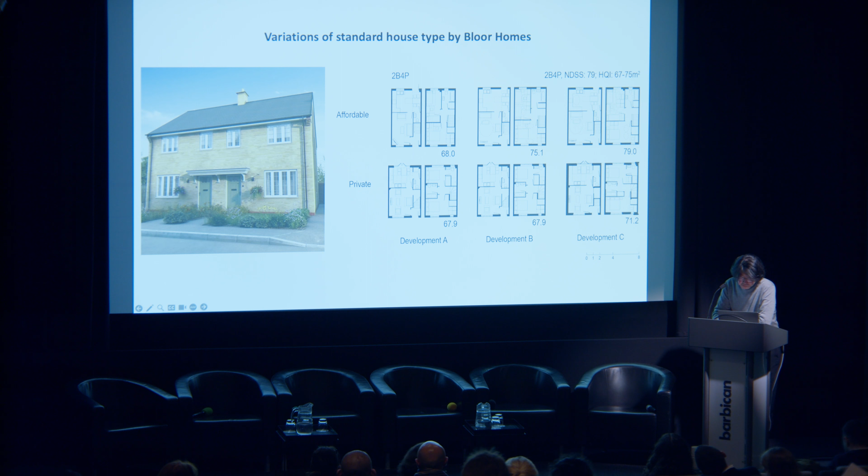As an audit by the Place Alliance found, the design of 3/4 of 142 large-scale housing developments completed in England from 2014 to 2019 were mediocre or poor, and over 1 in 5 developments should not have been given planning permission. Much housing in England is the outcome of economic decisions and established practices and preferences by few large organizations, with the 10 biggest volume house builders responsible for 59% of new private homes in Britain. This limits diversity in housing supply and design.

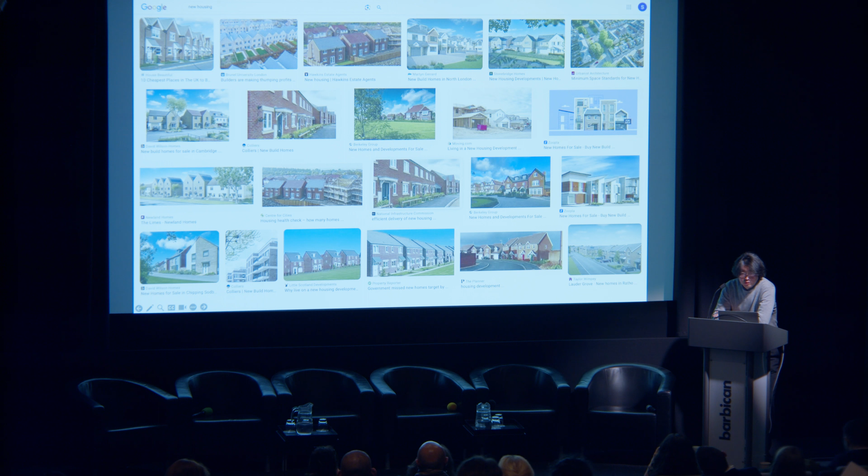Our project is therefore interested in the role of standardization and design governance in shaping housing outcomes and experiences. This is essential to understanding how design quality is defined and controlled, but also how it ultimately affects everyday life. By design governance, I mean the formal and informal tools employed by the government and housing providers or stakeholders to control the quality and types of housing being supplied. As categorized by Matthew Carmona, design governance encompasses 3 key functions: guidance, incentive, and control.

Our focus is on subsidized housing, increasingly referred to as affordable housing, which is typically designed to just meet the minimum legal and market requirements and characterized by standardization. Subsidized housing is where design regulations arguably matter most, and subsidies are commonly conditional to meeting minimum standards. So-called affordable housing is, however, often not affordable to many low-income households.

In 2021, only 12% of affordable housing was for social rent. The average affordable rent in England of £136.29 per week equates to 46% of the median annual household income of the poorest fifth in the UK. The majority, 54%, is for affordable and intermediate rent homes, which can be up to 80% of local market rents, and in less affordable areas exceeds the median national income. And of course, as you might know, shared ownership is targeted at mid-income households.

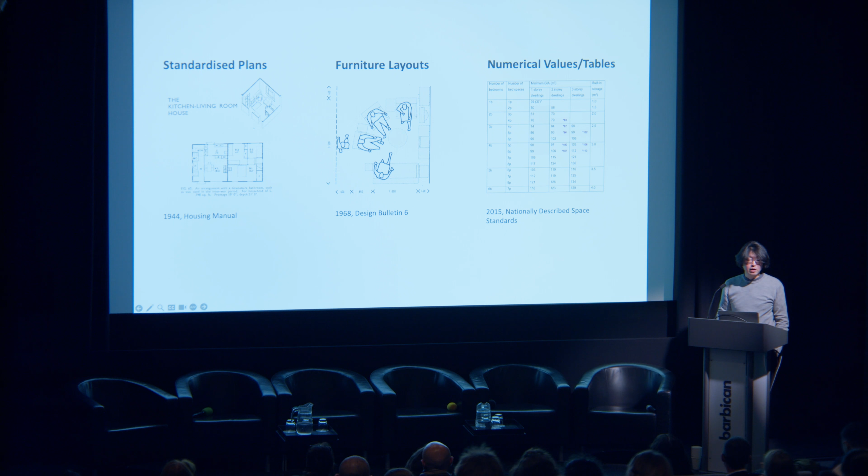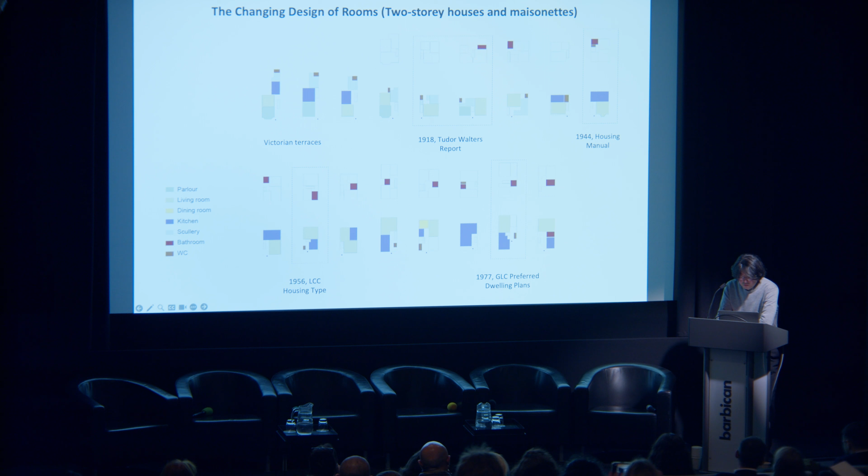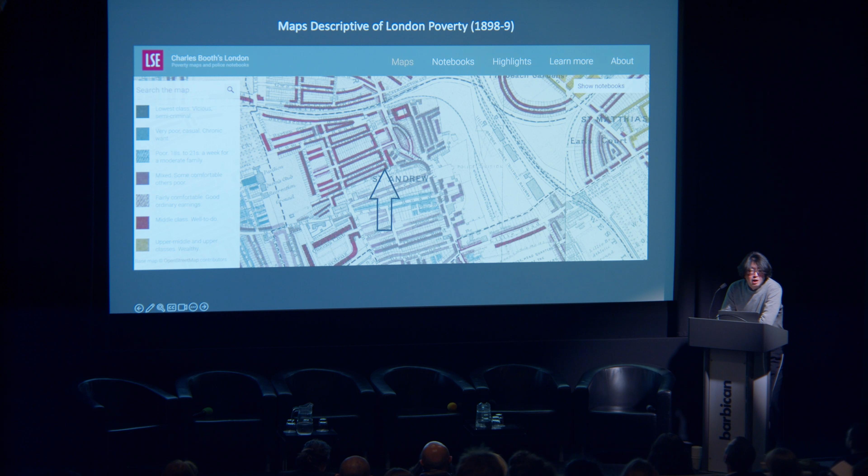Space standards have become a key measure of housing quality based on two fundamental beliefs still largely upheld. First, a socio-spatial belief harking back to 19th century Victorian charitable housing trusts that improving the housing and life of the lower classes means improving their moral behavior and social conduct. Second, a socio-technical belief that socio-spatial relations can be mapped, measured, and improved, as first demonstrated by Charles Booth's social cartography.

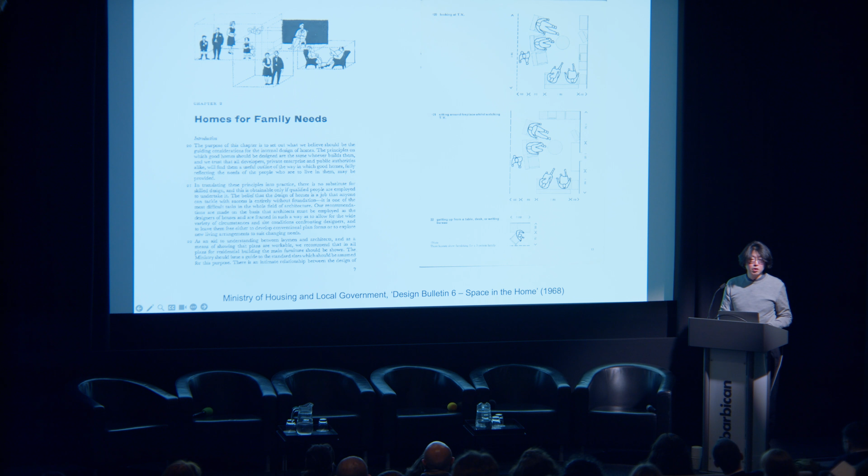Space standards instrumentalize these beliefs by translating normative daily domestic activities and spatial hierarchies based on social norms, specifically the nuclear family, into graphical, anthropometric data, standardized furniture dimensions and activity zones, and circulation space required by the various expected uses of a home. This principle of abstracting home use, function, and social norm into a drawing with dimensions has become a pseudoscientific proof of good design and conventionalized by design handbooks such as Ernst Neufert's Architects' Data and the widely adopted use of minimum space standards.

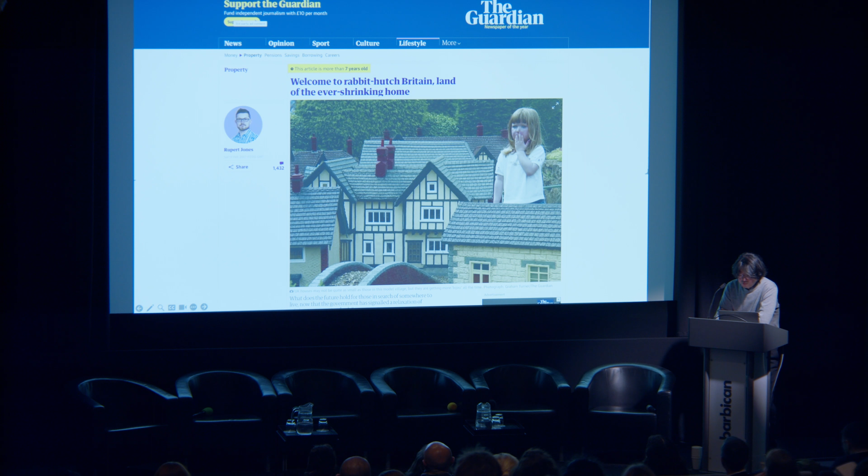A key problem of minimum space standards is, however, that rather than being aspirational, they often become the targeted maximum dwelling size that does not necessarily ensure usability, as we all know from COVID-19. Despite a long history of space standards since 1918 in England, properties are marketed and described in relation to the number of bedrooms, not overall floor areas or cost per square meter, with many homeowners and renters therefore not knowing how big the properties are. At the same time, the small size of homes in England is frequently discussed in the media.

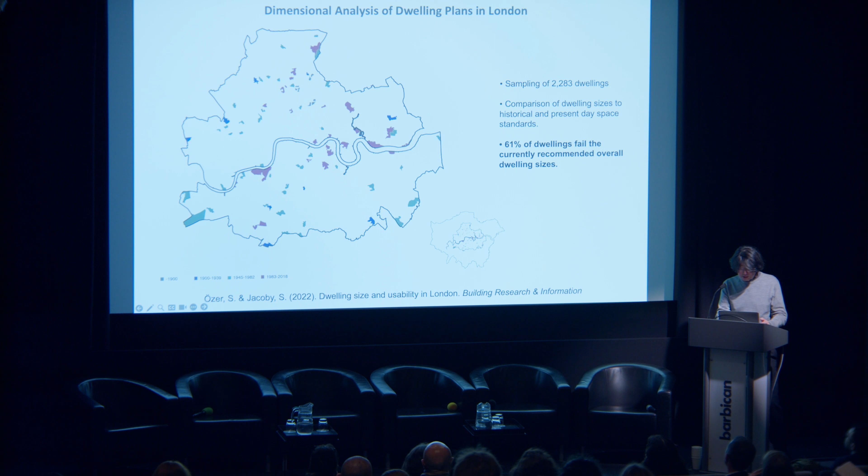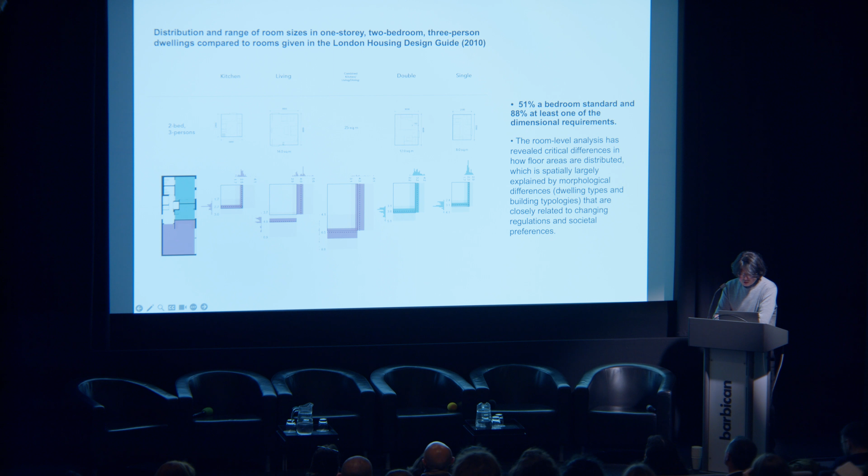We therefore studied dwelling sizes in London, and as the housing stock is very old, with 56% built before the end of World War II, and many properties having been substantially changed over time, we found that 61% of dwellings failed the space standards of the 2010 London Housing Design Guide, which is fairly translated into the current nationally described space standards. In fact, 88% of properties failed at least one of the minimum recommended dimensions in the London Housing Design Guide. However, since the introduction of the guide, the overall failure rate has dropped to 33%.

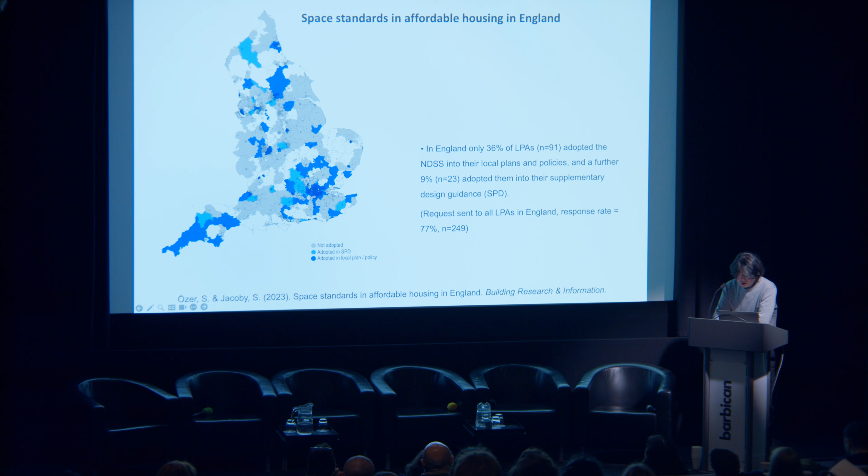We subsequently studied the space standards of new affordable homes in England. The current nationally described space standards, however, are not mandatory, and only 36% of local planning authorities have adopted them. We found that 43% of the dwellings we looked at failed the space standards. Now, to answer the question if space standards work, the simple answer is yes, if comparing outcomes between councils that have or have not adopted space standards. But it is more complicated.

As this table shows, the overall compliance rate in local authorities that adopted the space standards is 69%. However, less than half of all houses meet the NDSS, as they can provide the expected room sizes without achieving the overall space standards. There are significant differences in regions and between housing providers, yet even where homes do not meet the current NDSS, they are designed to some standards, such as the HQI, as the data shows here. Right?

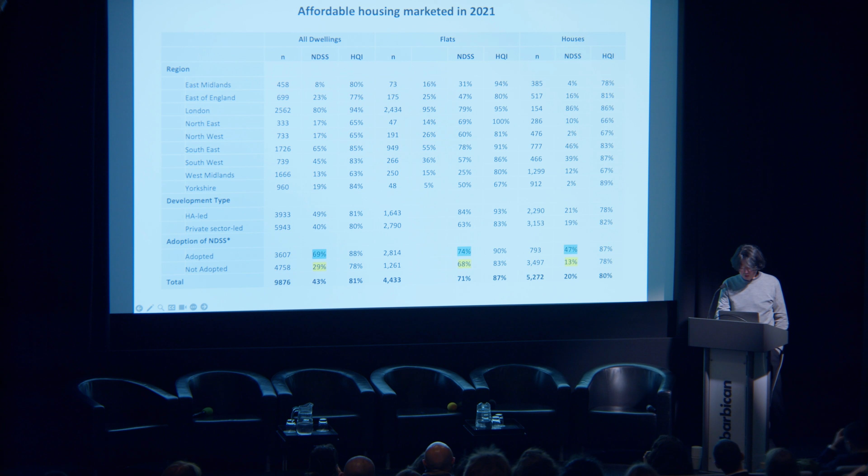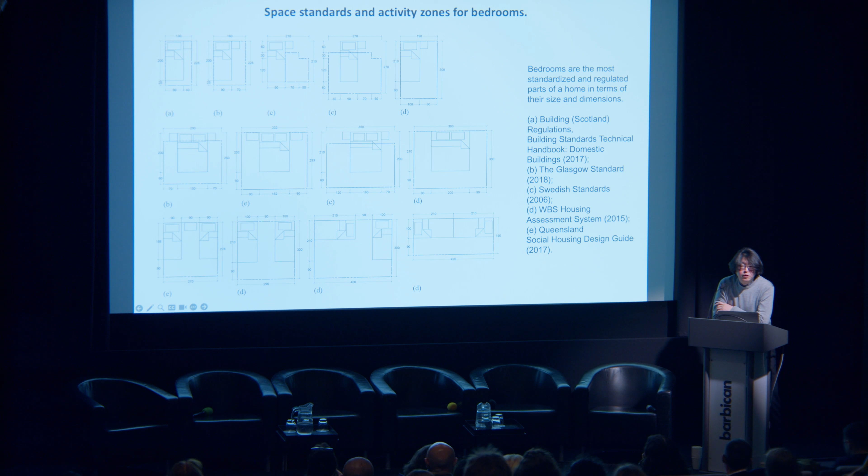Standards have been in use before. Even room standards and required activity zones that we would assume to be more objective can differ significantly, indicating various furniture standards and cultural expectations. For example, the minimum size of a double bedroom ranges from 9 square meters in France to 12 square meters in Scotland. In Australia, a minimum 90 centimeter wide movement area next to the bed is required, whereas in the London Housing Design Guide, it is only 40 centimeters.

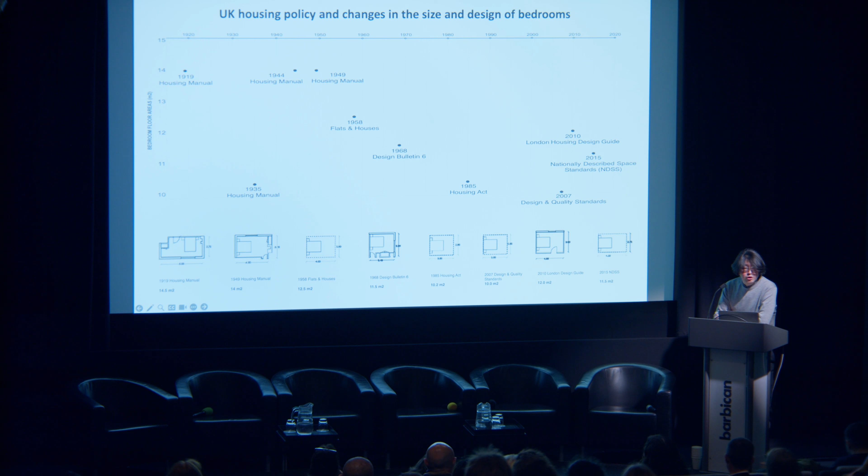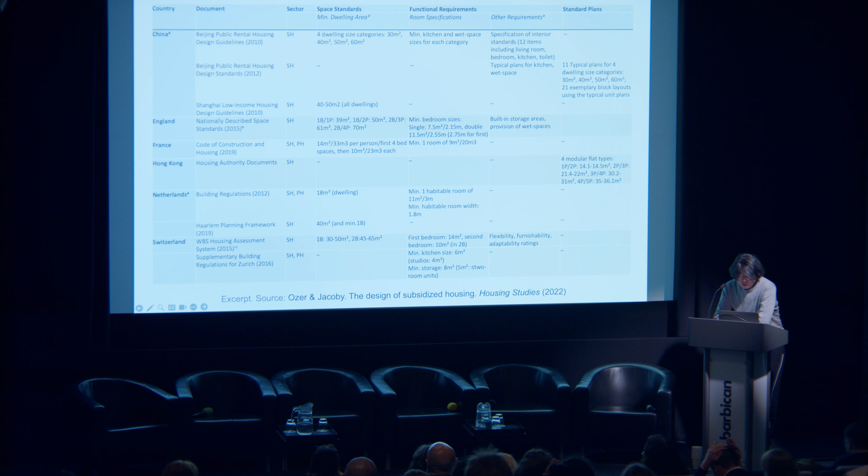These differences are only partially explained by housing provider tenure or target group, especially in countries with universal design controls that equally apply to all sectors, and often reflect different economic development and sociocultural norms, resulting in vastly different dwelling sizes and housing expectations. This is also evident from how housing standards and quality are determined or controlled in different countries. And the dwelling size is prescribed. For instance, the standard unit size for a two-person dwelling is 14 to 22 square meters in Hong Kong, 28 square meters in France, 49 square meters in Canada, and 55 to 65 square meters in Australia.

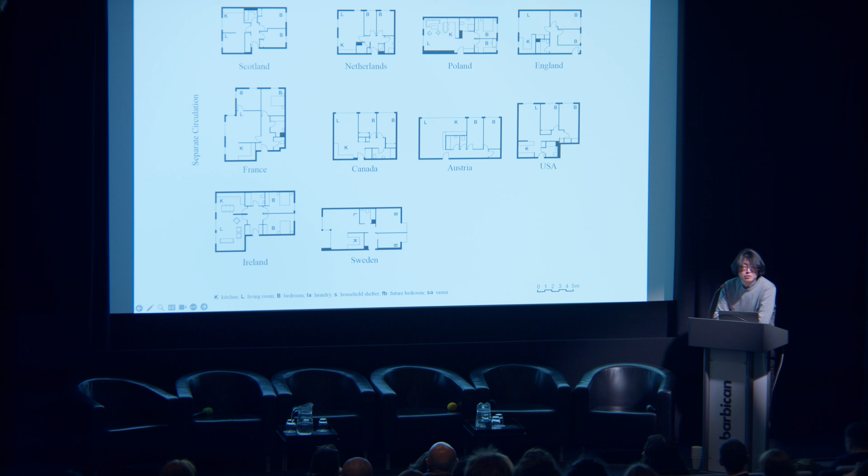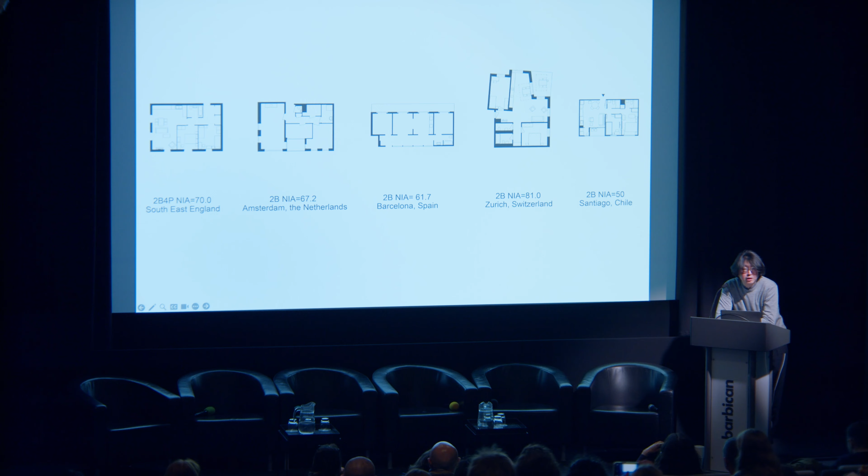With housing in England, the Netherlands, and Chile delivered by large volume house builders, highly standardized layouts are common, whereas in Barcelona and Zurich, where developments are typically based on design competitions, there's much greater variation. In the countries discussed tonight, housing in Zurich is noticeably larger than in England. Homes in Santiago are much smaller, and in the Netherlands and Spain, they're slightly smaller than the ones in the UK.

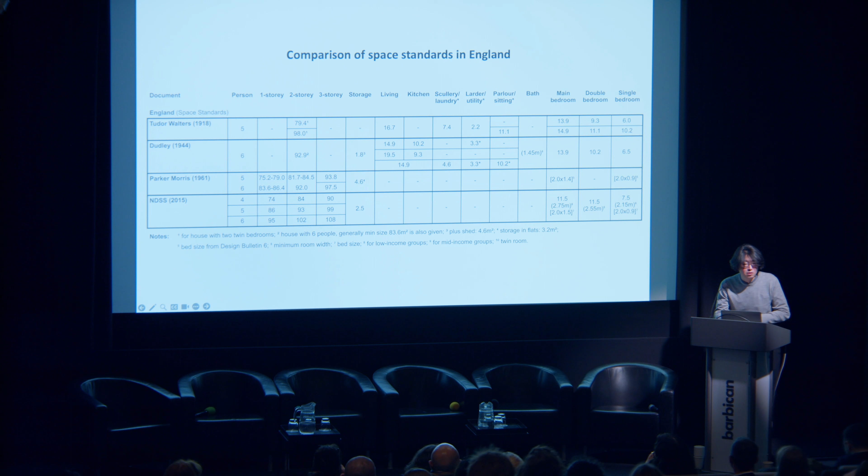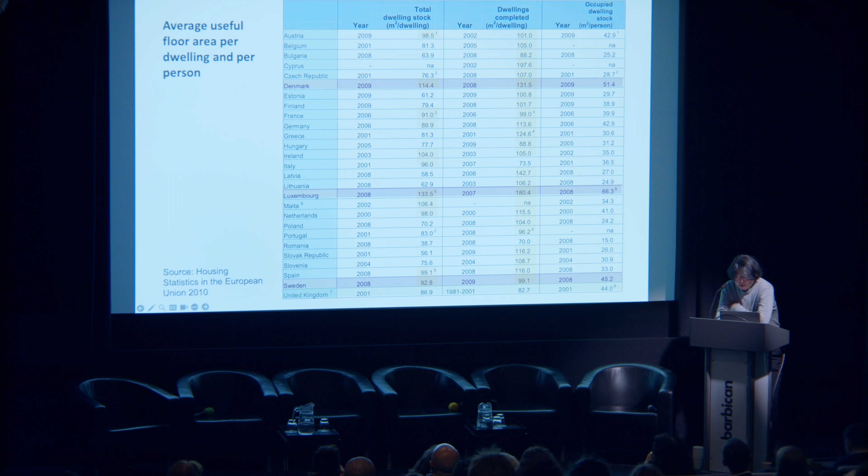To put this into context, we have seen increases in space standards in England over time. For example, the NDSS is about 10% larger than the Parker Morris standards from the 1960s that are still often quoted today. A European-wide comparison in 2010 of square meters per person shows that England is only behind Denmark, Luxembourg, and Sweden, even before space standards were reintroduced in London and then subsequently nationally, with comparative dwelling sizes since having significantly changed, as you can see from this.

Although England's homes were larger in 2010 than in most other EU states, when comparing like for like, there is extensive underoccupation and a preference for homes with more bedrooms, and, importantly, an inequitable distribution of floor area per person, especially in the private rented sector. Floor areas, therefore, provide only a limited understanding of home use and lived experience. Studying housing expectations and actual use is equally important.

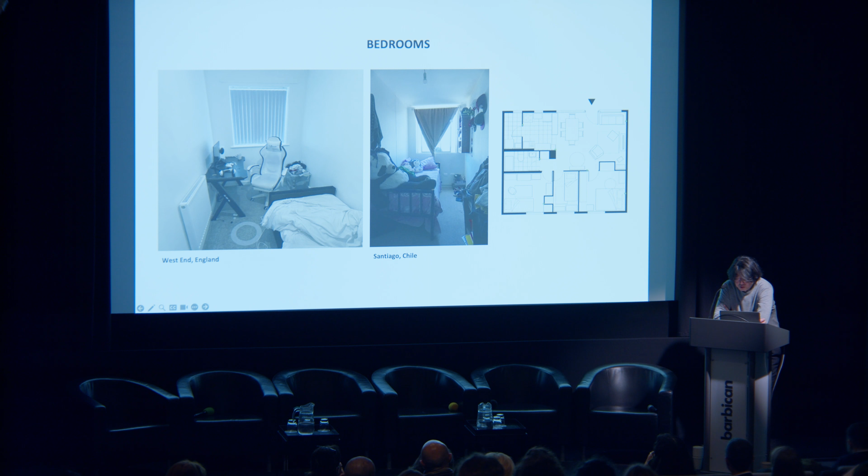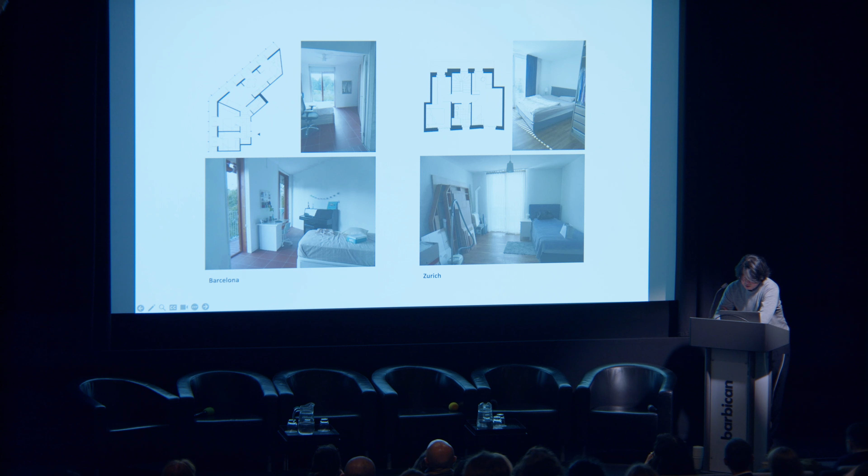For example, in England, especially in social rented homes, and in Chile, the room sizes are hierarchical, with secondary bedrooms often designed to fit just a single bed, a small desk, and perhaps a small wardrobe, assuming the needs of a family. In contrast, in Zurich and Barcelona, more rooms tend to be designed to fit a double bed, offering greater flexibility. There are also cultural differences in the expected services or amenities found in a home.

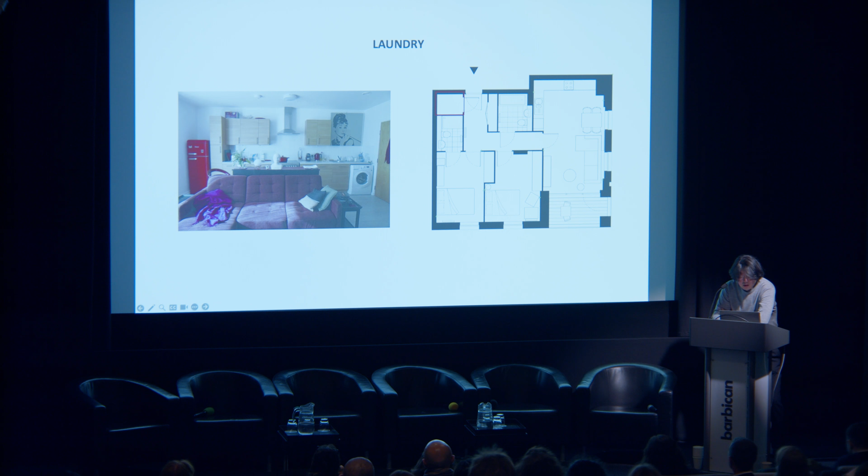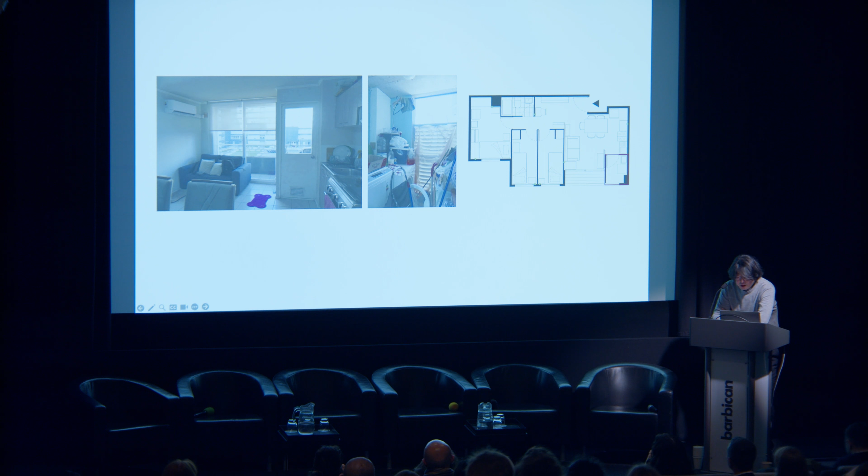In Zurich, communal washing machines are common. In England, new-built homes now provide a standard utility cupboard that can house a washing machine, but they are still often part of the kitchen. There's also no designated space for drying clothes. Whereas in Chile, a ventilated loggia next to the kitchen for washing and drying clothes is the norm, despite overall very small dwelling sizes.

Similarly, there are differences in the finishes of fittings expected. For example, kitchens in Zurich come fully fitted with all appliances and cupboards. In Barcelona, kitchens are only equipped for basic use, with residents often upgrading them. In Santiago, the kitchen provision is just a sink, and all kitchens are part of an open-plan living area, which is too small to use the dining table without moving it for every meal. In England, kitchen provisions depend on the housing provider and tenure. One participant mentioned to us that their home came only with a stove.

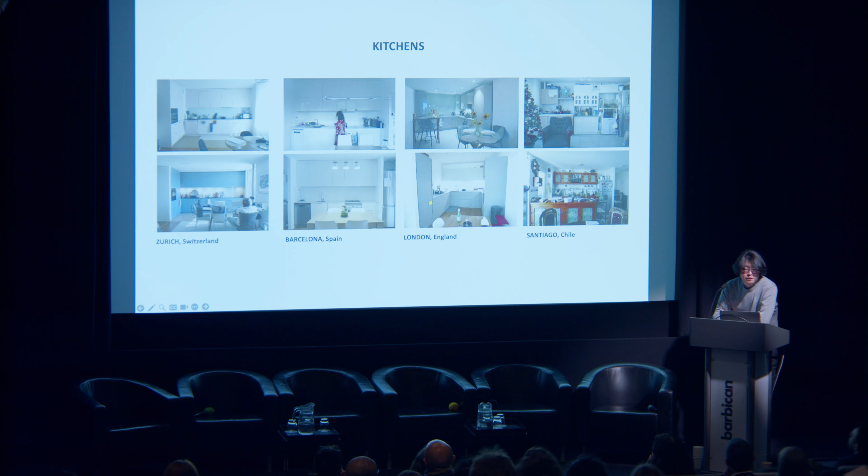We therefore studied how people furnish and use their homes, as this is typically very different from what is drawn by architects, to gain insights into the discrepancies between the assumptions about dwelling use that underpin space standards and everyday life at home. As part of this, we have used live motion tracking of occupants to understand the patterns of use, with occupants often surprised by how their use of homes differs from how they thought it was.

When we asked in a survey with over 1,200 respondents from London what they liked or disliked about their homes, the responses were surprisingly more balanced than expected, indicating the difficulty in generalizing housing problems, uses, or needs. The most problematic homes suffered not always from the most obvious large problems, but an accumulation of what might seem minor problems, often hidden in small percentages.

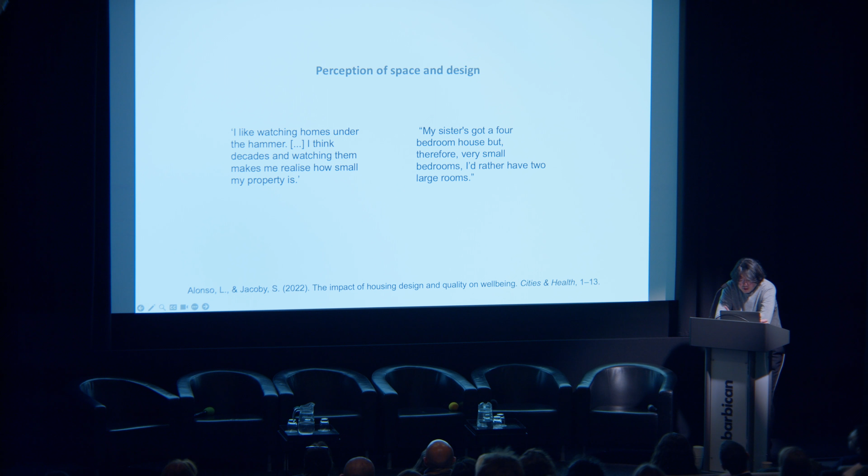Also, what people meant by design was very interesting. When interviewing some survey respondents, they spoke about how comparison with TV shows, friends and family, or the place they grew up in shaped their perception of housing. There's a great discrepancy, therefore, between what designers, regulators, and occupants mean by housing standards and housing quality. The agency to make changes to their homes was seen by many as essential to well-being and positive lived experience.

From our interviews with occupants of affordable homes in different countries, it is apparent that there are vast differences, but also significant small nuances in housing experiences that are important to understand. The generalized and standardized approach to regulation and design tends to be most problematic to those in greatest need of protection and support. Therefore, future housing standards and design need to take greater account of lived experiences and social expectations and values that shape socio-spatial realities and housing perceptions.